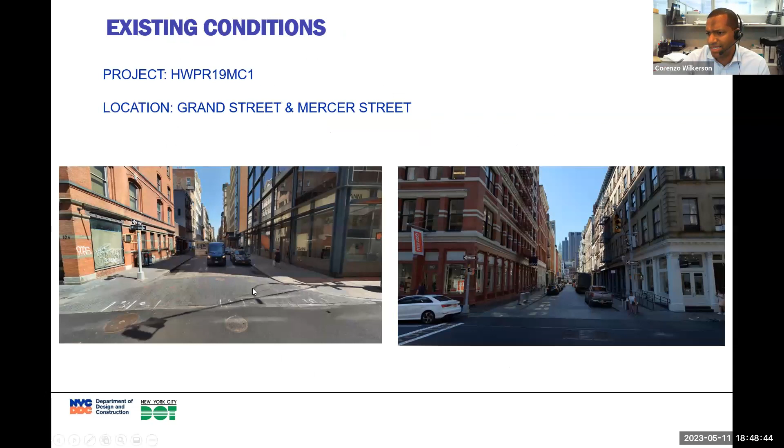Our next intersection is Grand Street and Mercer Street. It has an existing condition as per the previous location. We're only working on 3 of the corners here because DOT has considered this corner compliant. We'll be installing curb extensions with blended transitions and two tangent ramps on the left-hand side of the intersection, and a blended transition on the right. We can see the granite paver crosswalks that we're going to be installing, crossing Mercer Street.

Our next intersection is Prince Street and Mercer Street. We can see some of the non-uniform material with utility cuts from the past, and someone tried to put in a makeshift ramp here as well. At this location we'll be working on 3 of the corners: installing two tangent ramps on the top right, a blended transition on the top left, and a shared bottom landing on the bottom left. Then we'll be installing the granite paver crosswalks crossing Mercer Street.

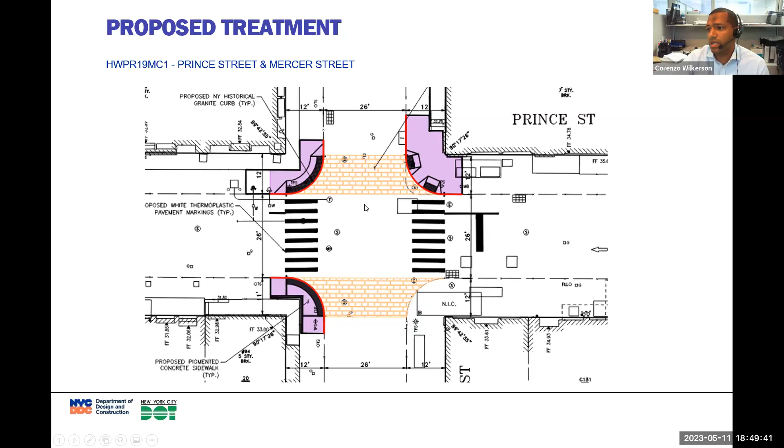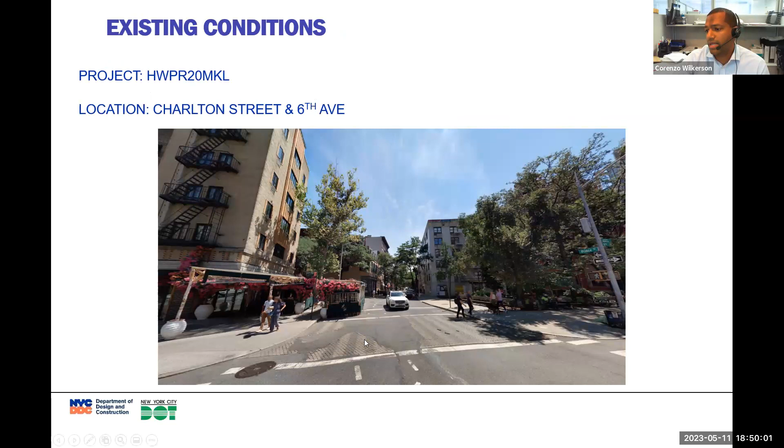Our next location is in project 20 MKL: this is Charlton Street and 6th Avenue. You notice here we have non-uniform material, one material in one location, but due to utility cuts it's asphalt in others. At this location, DOT has specified that only one corner needs to be upgraded. On Charlton Street we'll be providing the granite paver crosswalk, which will run parallel to 6th Avenue.

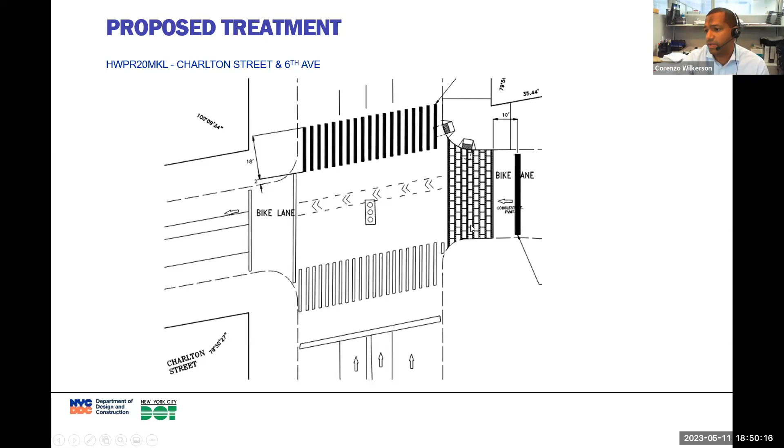As you move along from one project number to the next, is there any difference from our point of view in these groupings?

We've grouped the projects all together, but these locations, as I'll get to on the last slide with the timeline, all have ramps that are going to be upgraded, and they all have the same purpose. It's just that DOT has specified different locations to be in different projects. Each project has about 60 or 70 locations in it approximately, so we couldn't have all of them in one project, at least not at this time.

Our next one is HWPR 20 MKL, at Broome Street and Greene Street. We see the existing conditions, and we plan on working on all four corners here, installing the granite paver crosswalks crossing Greene Street.

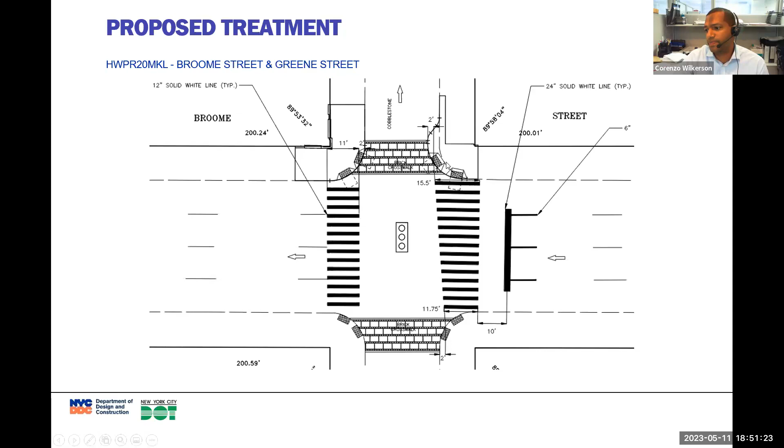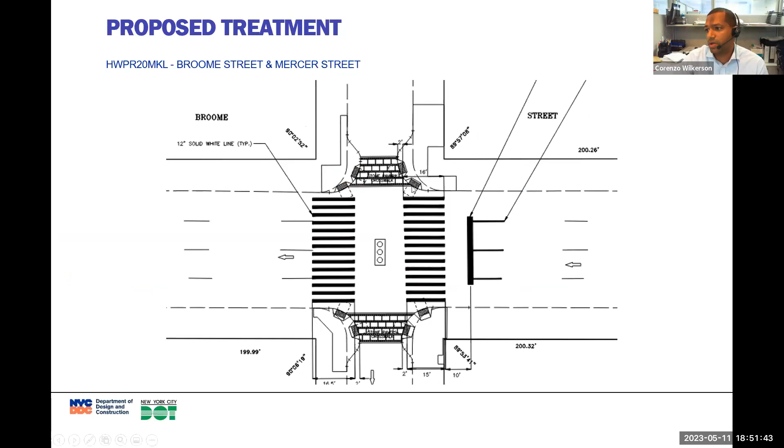Next one for MKL is Broome Street and Mercer Street. These are the existing conditions, and this is where we plan on installing the granite paver crosswalks, crossing Mercer Street as well. We have some curb extensions, so we're going to be shortening the crossing to make it a little bit more accessible, also due to some vault conditions we've encountered during our design.

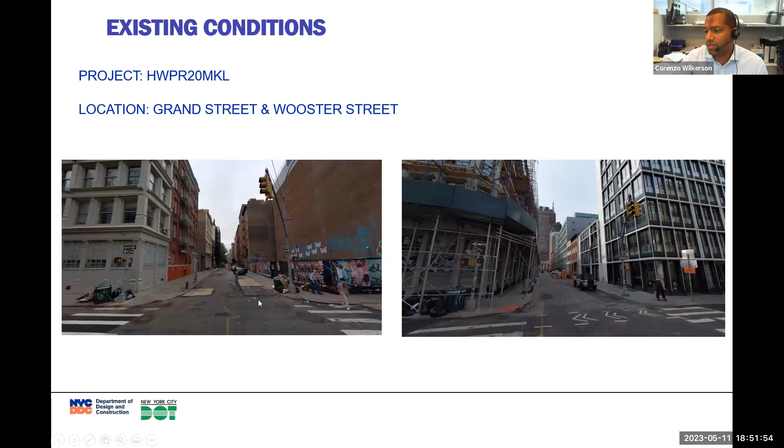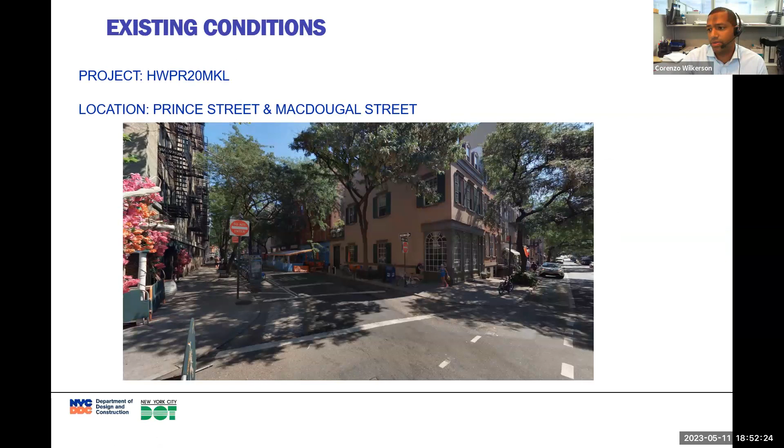Our next one is at Prince Street and MacDougal. This is the existing condition. As you can see, once again, different types of materials within the crosswalk, and the ramps are not to current standards. We plan on upgrading them on both sides and putting in a nice wide granite paver crosswalk here.

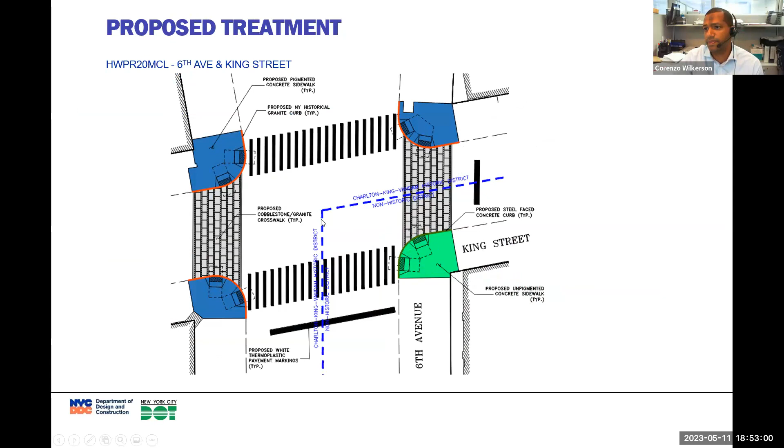Next one is HWPR 20 MCL, close by 6th Avenue and King Street. We're going to be installing the granite paver crosswalks on both sides of the intersection along King. This is a representation of basically where and how that's going to be done. All four corners are going to be worked on, and the granite paver crosswalks will be crossing King Street on both sides, east and west.

Our last location is HWP 2020 LM, at Greene Street and Prince Street. This is the existing condition, and this is where we plan on putting our granite paver crosswalks in conjunction with our ramps, as we see here.

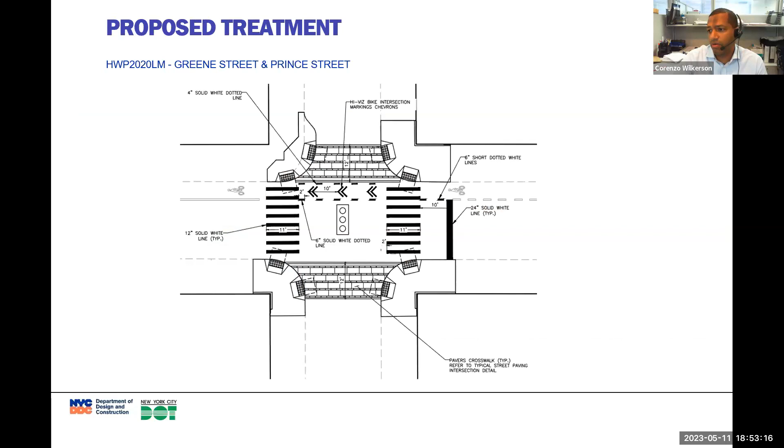So project timelines. For HWP R19 MC1, we're basically in the pre-bid stage. We've wrapped up our design and gotten most of our approvals. We're working with LPC now, but we had to come to the community board first.

For MC1, we plan on going out to bid in the next month or two. For our next one, HWPR MCL, we're in final design as well, and that one plans to be finished in the fall. Our last one is HWP 2020 LM, which is in preliminary design right now, and we plan on finishing that project at the end of the year. These should all be in construction next year.

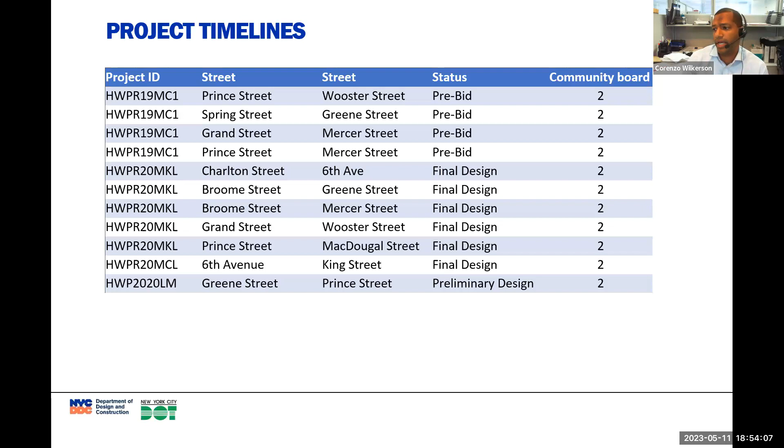That's the end of our presentation.

One thing that we are looking for is just a letter of support.

I think it's all clear. What we're here particularly addressing is, simply put, what it looks like. You mentioned, and if you would say in more detail, the way in which the materials blend or harmonize with the historic pavings, particularly the cobblestones.

As you can see, the cobblestones are incorporated into the crosswalk, but we also provide a smooth granite paver, which allows for a smooth riding surface so that those with disabilities can easily cross the street from one curb. Clearly, cobblestone is not a good surface for a wheelchair.

Yes, it's not. So what we're going to be doing is installing smooth, ADA compliant cobblestones. They will be cobblestones and will look similar to what's out there, but they'll be smooth so that they're ADA compliant.

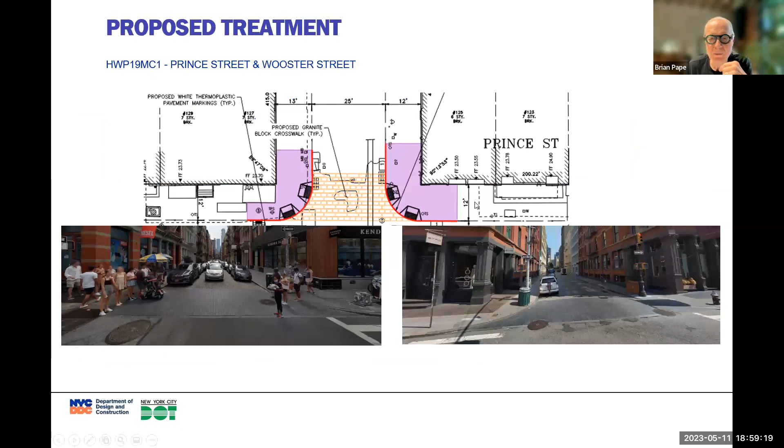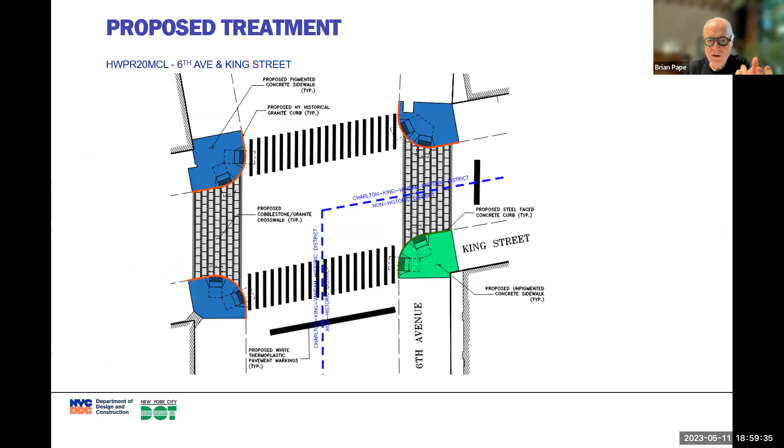My question is on King Street. It seems to me that none of the intersection with King Street and 6th Avenue is cobblestone - if I'm correct about that, it seems to be all asphalt. So you're putting in stone intersection crosswalks, but it's all asphalt. Is that not correct? So there's a different type of block here, if you notice in our picture.

There was a distinct material that was used. The standard DOT material that we would use is asphalt, but to keep with the character of this intersection, we were going to come back with the granite paver crosswalk. I see - it is an asphalt street, but the crosswalk has a distinctive paving material.

Thank you very much, and congratulations on this project. Other people, just go along the group, whoever wants to speak. Eugene? Yeah, can I speak, I have my hand up, Bo. Okay, I apologize, I had trouble getting in, I finally got into the meeting.

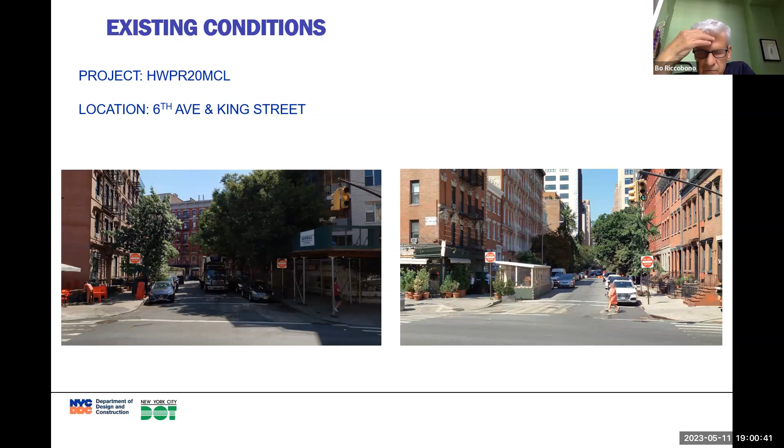Maybe this was addressed already, I apologize. To Brian's point, what happens is, as most of us probably know, individual contractors come in - if you have a water problem, or there are many reasons streets get torn up - and then they're not put back in the proper way. That's just the nature of it, whether it's Con Ed, the telephone companies, or water; a lot of it requires attention to the water feeds going into individual buildings. So I don't think we'll ever get good cobblestones, because of the necessity of doing this repair work, it happens all the time, and the repairs are not good.

That said, the crosswalk issue - I don't know if anybody's mentioned this, but I'm part of the Soho Alliance, and we're very concerned that the pavers might be too large because they crack. This has happened over the years. There's an honest attempt here, apparently, to do the right thing, but because there's an incline at those intersections, the fact that the pavers are so large, in my opinion, makes them very susceptible to cracking, and they do in fact crack. At some point, some of us were able to get DOT to go back and redo the crosswalks in a smaller brick-like fashion. But I wonder if the representative could opine on that - whether these pavers are better than the ones we've had in the past.

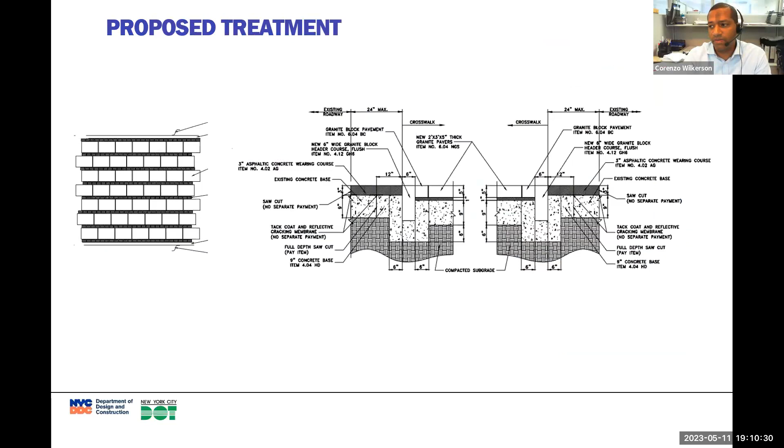Okay, I'm happy to send what's happened to whoever would like to see them. I can send it through the board for you to have visuals of what's happened, because I've definitely documented it over each time. And what we always suggest is 311, bring it to DOT's attention. They're the ones that came and they respond every time.

As explained, we can't discuss the whole neighborhood and structure. Your other questions, you have a place to present them. This is simply not it. That's fine.

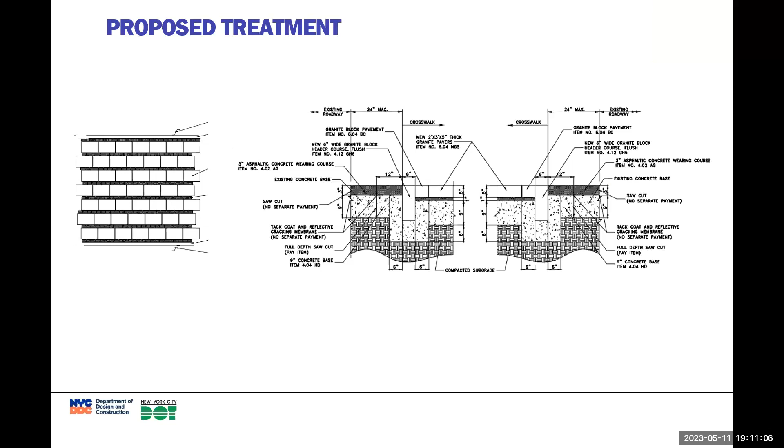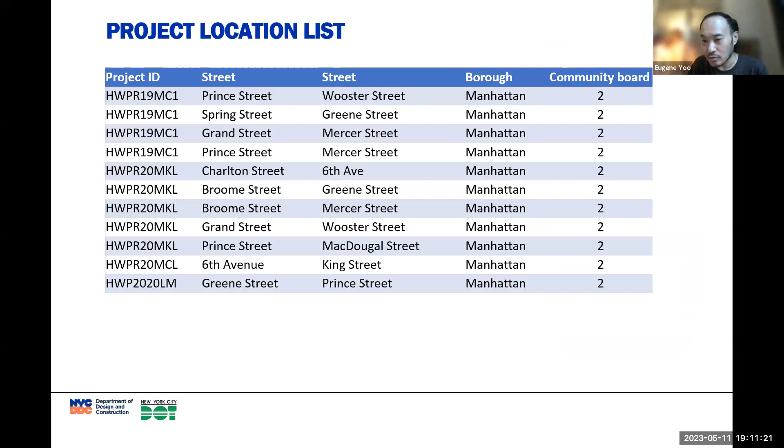Great, thank you, and thank you for the presentation. A couple of questions. On your slide that says proposed treatment that shows vestry, the corner pads that are seen there are white.

Yes. Those are detectable rubber or warning strips, plastic or whatever material they are, they're white here. Is that what we're gonna get in Soho?

Yes, you'll be getting that. Great. Because it's pigmented concrete, you'll have the dark concrete on the sidewalk. Based on the current federal and ADA standards, there has to be a contrast for those with low vision.

So we'll have the white on the dark. Great, so we won't be getting yellow or red like we see elsewhere. No. Okay, great. As long as the corners are in a historic area. So if you have streets that are not considered historic or landmark, they will get the red ones.

Okay. And then for the areas, particularly where the bump outs are being built and the drains, the catch basins, are being dug and installed, two things: One, what is the time frame for when that corner will be out of service? And what is being planned for crossing while a crosswalk is being laid and therefore that crossing is not available?

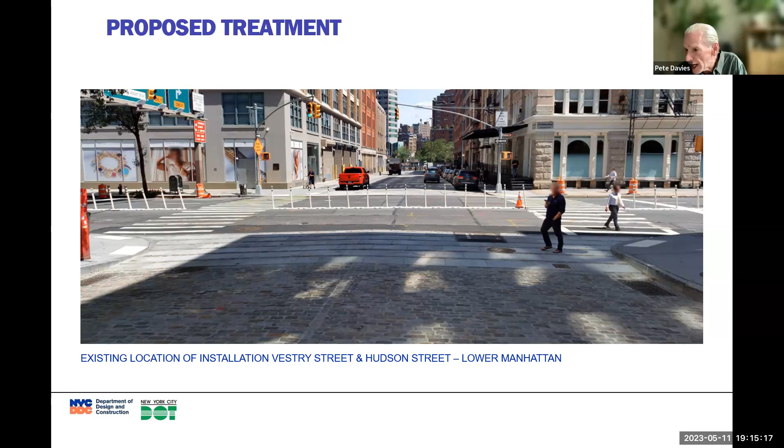So there'll be lighted timber curbs and also pedestrian channelizers, which we'll be using so that individuals, if they're blind or low vision, they'll be able to use their canes or walkers to delineate where their passage is so that they can get onto and off the curbs. And if there are any specific issues with the building because of vaults or whatever, you'll be providing a contact coordinator. Yes, there'll be a CCL individual from DDC.

The community board will be able to talk to that individual about any concerns regarding the project, and then they'll work with the contractor to help resolve those. So the community board will coordinate something with the community so they know who to be in touch with. Yes, we have a community liaison individual from DDC who works with the community on all of our DDC projects. Okay, thank you very much. You're welcome.

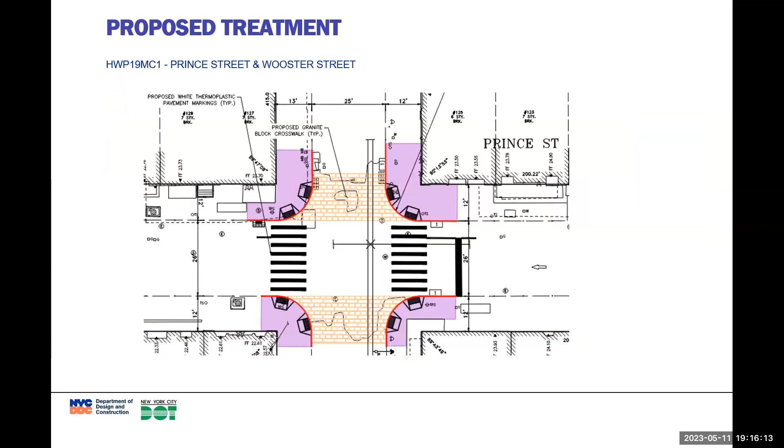I'm going to ask about a specific item on page 12 of the application that shows the intersection of Spring Street and Greene Street. You have a bunch of different kinds of curb treatments, and I don't know if those are suggestions for what may be used in different places and no decision has been made, or if the bump out decision has already been made. If so, on what basis has it been decided that it is within historic representation? Because clearly there are no bump outs in the history of Soho, so that seems inappropriate. In addition, there's a shared bike lane for Spring Street, which complicates it considerably when you have bump outs, because pedestrians tend to stand too close to the edge. Also, has this proposal for building bump outs at this intersection been before the Traffic and Transportation Committee, or does it expect to be?

Those are my questions. For the first one, these aren't suggestions - these designs have all been approved by DOT and coordinated with several other city agencies and utilities. I meant in their specific places you've shown them, like the northwest corner. Yes, everything in that specific location, and the other one is in that specific spot. So you wouldn't do a bump out on the other side, just that one? Yeah, just as we have shown - that's what we're going to be doing. That would be objectionable to me, precisely because of history. There's no point in changing what existed in Soho beforehand. But carry on, please.

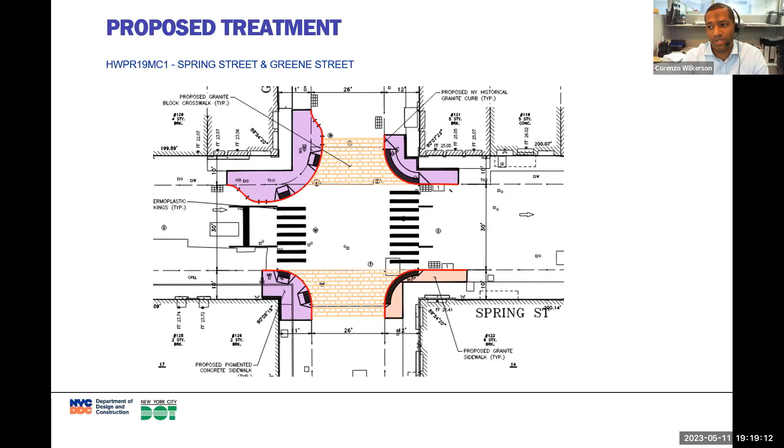The other question was whether this has been before the Traffic and Transportation Committee.

So with our ADA compliance, in order to reach ADA compliance for these types of projects, we are not going to the regular community boards, since we are not asking for people's opinions. This is for accessibility. I'm not sure if everybody is aware, but it's on the DOT website. DOT and the city have been in a major lawsuit in which we have to provide access for every corner in the city. If you could imagine, we have 50 locations in each of these projects, so you're only seeing a portion of them.

So we do not attend community board meetings unless we need approval for LPC, and that's pretty much the only time we go to community boards, whenever those agencies ask for us to go to them. Again, if you have a comment, problem, or question, address the community board office for non-landmarks things, and they'll point you to the right place.

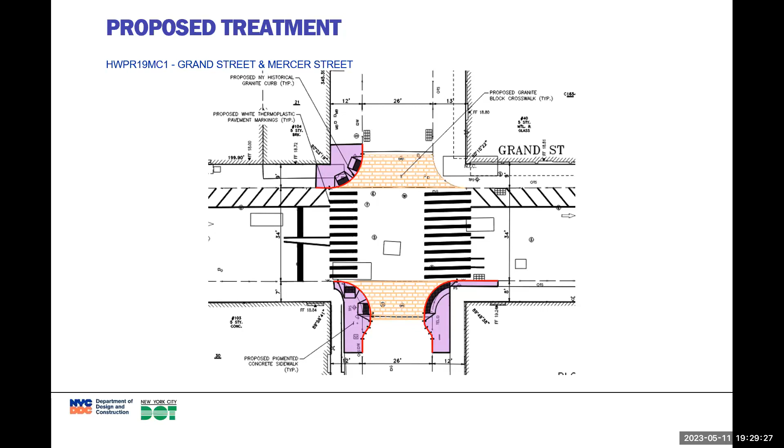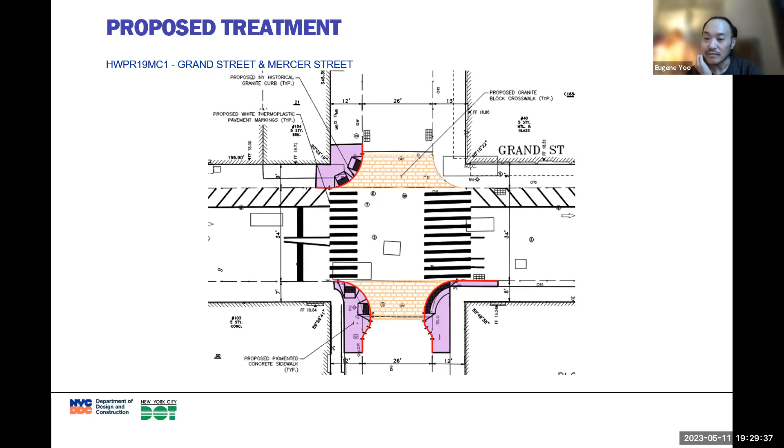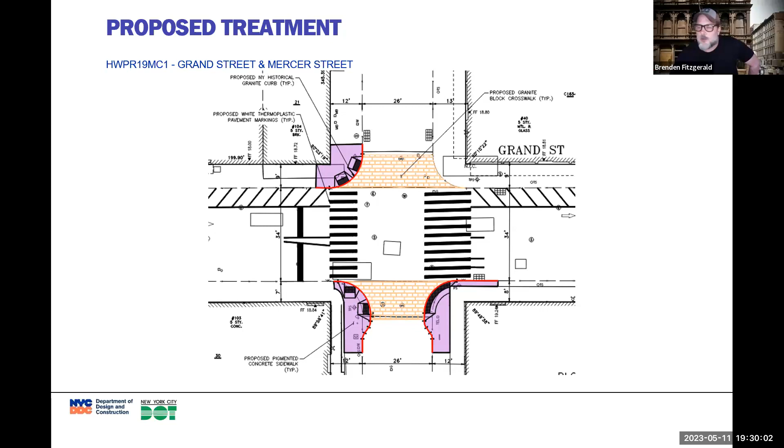Historic granite, there's a plan to remove that in these corners? But you know, they like- Are you talking about the curb, or are you talking about the cobblestone sidewalk, from the roadway? The sidewalk pavement? So the sidewalk, if it's currently concrete, then pigmented concrete will be going back.

If it's granite, all the curbs within the historic districts will be New York historic granite curbs, which there's a DOT standard spec for. So it'll match.

Yeah, I meant to say the sidewalk pavement, where there's granite sidewalk pavement, the very large flags. Oh, so those are basically going to be retained, we're not allowed to rip those out. So those will be reset. If they're broken up into pieces, if they're not a homogeneous nice square, then we'll purchase new pieces that will match, and we'll install those.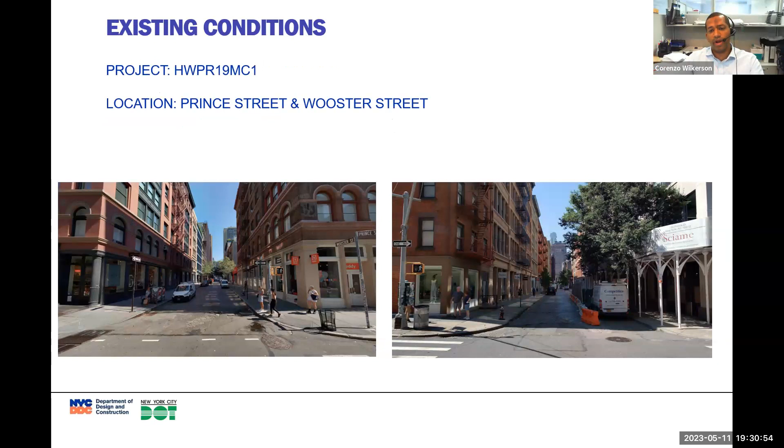So that we can put in ramps. Yeah, I mean, they can always be put in a little bit cracked too. There are some that are brilliantly carved and fan out. I'm not sure if any of these are at these locations, but they're very rare. So even if there's a crack, maybe there's a way to just consider patching. I would suggest that might be something to look into.

Just to answer your question, we do have in the contract wherever there is granite pavement, that's what we call it, it's to be reset. So if at all possible, unless it's broken up into a lot of pieces, we do have to provide a smooth walking surface.

Yes. And then is there a plan to, along with the crosswalks, set a standard that can be applied also to the granite setts? Because there is no standard now, and what we end up with is kind of a hodgepodge, some contractors are filling it with cement with aggregate, some are using just straight cement, some are just filling in with dirt. And so we end up with a situation that's very uneven and very unsafe.

So I would just suggest to check in with the London standards, or go back to the standards from 1912, there are books on that. Just to check out the substrate, because I am a little bit concerned about straight onto the cement. Brendan, could you wrap it up please, so others can speak? It's wrapped up.

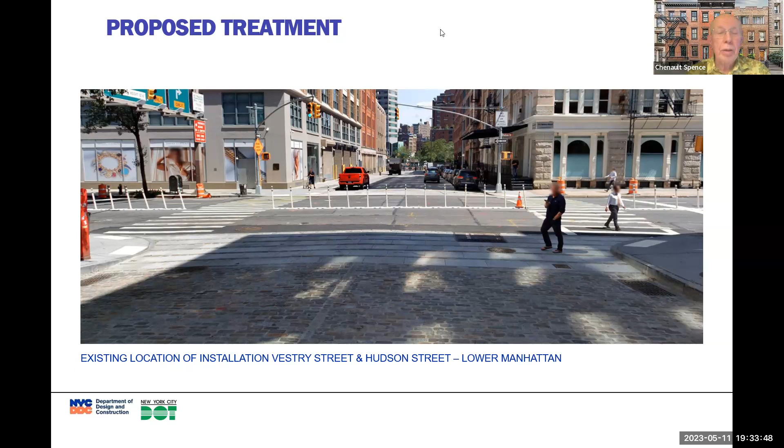We appreciate your care in what amounts to historic preservation, insofar as it's possible, in adapting the historic district to the realities of today. Thank you, thank you.

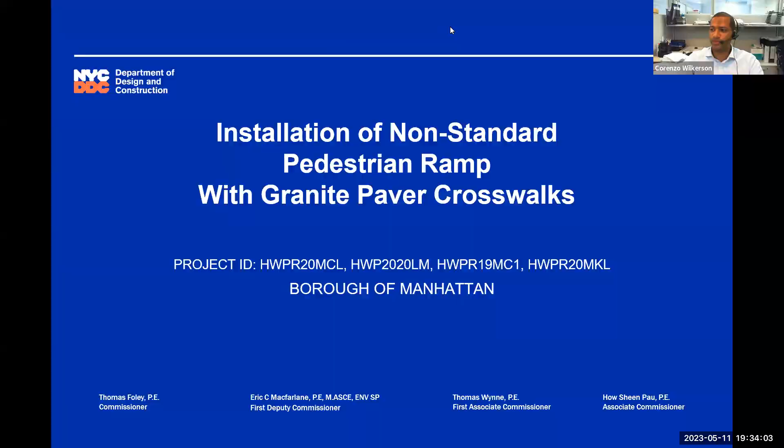And we will simply write a letter in support of the project. Thank you, much appreciated. A little bit different from a resolution that we normally do.

The next is 270 Lafayette Street. The application is to install a new storefront infill in one storefront bay on the Lafayette Street facade and two storefront bays along the rear Crosby Street facade.

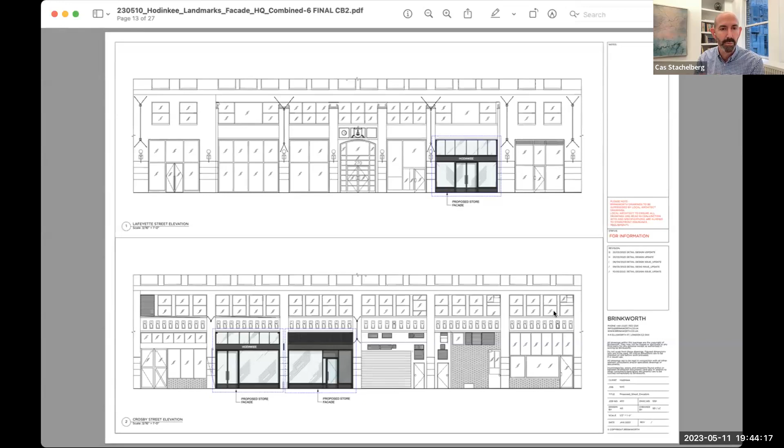Existing elevations along Lafayette Street here, and existing along Crosby here, and then proposed, just showing the new infill in those particular bays - one bay on Lafayette Street and the two bays on Crosby. Similar detailing on both; obviously there's meant to be a consistency from one side to the other, similar to the way we think the infill was done historically.

Existing view of the detail elevation on Lafayette Street and proposed on Lafayette. Again, this is a material sample - there's a dark granite panel proposed here, a bulkhead panel, 18 inches in height, and then tall kick plates at the bottom of the steel and glass doors.

The whole storefront system is proposed to be painted steel, an antique bronze finish - a dark, rich bronze color painted onto the steel. All the framing elements will be done in steel.

And then these are just simple - you'll see this in a detail - 8-inch letters, white painted letters with an LED light behind it. So it's an opaque letter that will just have a very faint halo glow behind it.

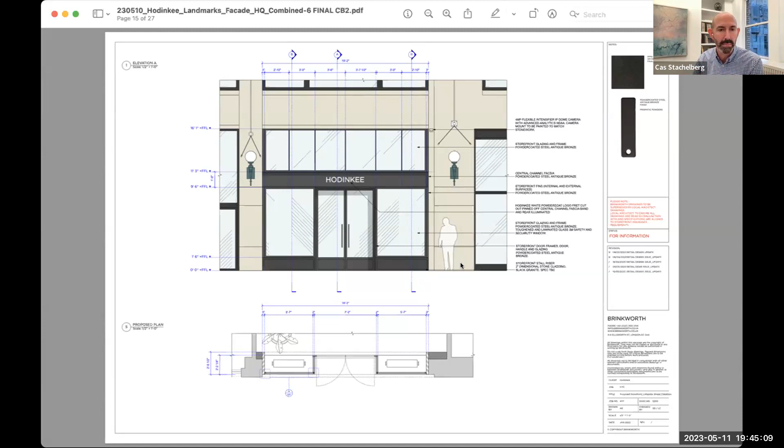Some sections - again, this is the roll-down gate with that spandrel or transom bar here, as I described, with signage mounted onto the front face of that. This is the door recessed back. And this is a section through the storefront window with the granite bulkhead and the roll-down gate assembly above, with a clear glass transom above that.

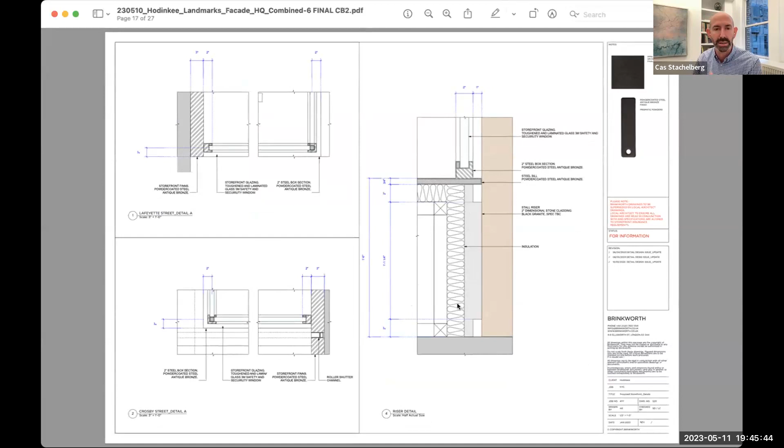Some additional details - it's a simple steel framing system, simple steel sill, granite bulkhead, really meant to replicate the dimensionality and simplicity of that historic storefront that we saw in the tax photo a few slides back.

On Crosby Street, the two bays currently have non-historic infill. And the proposal, as I detailed in the rendering, is large storefront windows, with a channel up here, only signage on this bay, on the north bay.

Louvers above the infill on the south bay, and clear transom windows on the north bay. Also, just to point out, and you'll see this in a moment in section, we're proposing a simple clock mounted onto the stone pier, 24 inches in diameter, about a 30-inch projection off the pier, and you'll see that in section in just a moment.

Similar detailing here, roll-down gates. The security concerns are very important to our client, particularly on the Crosby Street side, which, as you all know, is somewhat less traveled, certainly than Lafayette Street, with the infill recessed and a simple steel and glass storefront system.

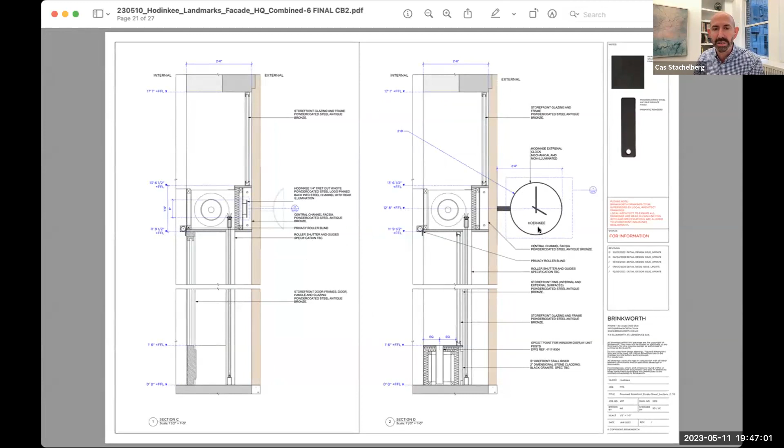This section here shows the clock. As I mentioned, it's just a white metal face with black letters, small letters on the face of the clock that just say Hodinkee. Those will be about 3 inches in height, and then the roll-down gates obscured by the spandrels.

So we think that the clock is a feature that one sees in the district, would have seen at least historically, and it's simple in design, and will provide the time for passersby. This is a detail simply mounted, sort of more similar to a bracket sign really, but also serves as a clock - it's 3 inches in width and 24 inches in diameter.

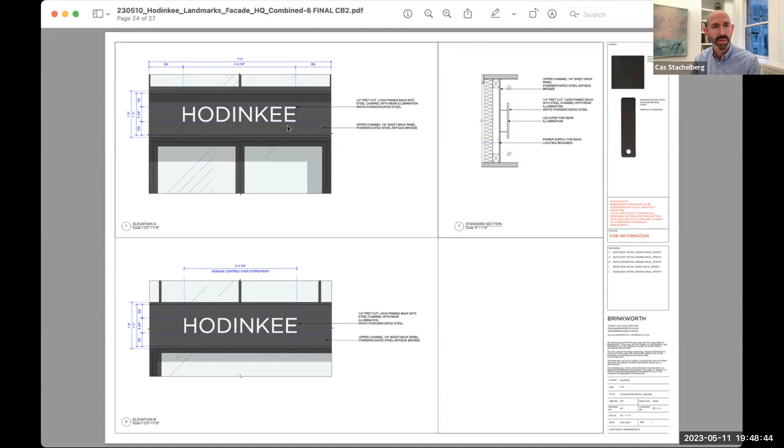Some additional details. Again, these C channels above the storefronts will hold the dimensional letters. These are just white painted metal letters, 8 inches in height, and behind the letter will be a low output LED, so there'll be a glow in the evenings on this back panel. The dimensional letters themselves are not illuminated; it's really the channel that is illuminated, both on Lafayette and Crosby.

Returning to the renderings you saw before, this is contemporary infill, but taking its cues from the historic condition, which was a simple, slender metal and glass system with a granite bulkhead. That's how we're detailing this, with a lot of transparency into the space through large plate glass windows, similar to what was there. Louvers up in the transom will provide necessary air intakes for the mechanical systems, the clock is mounted onto the pier, and then on Lafayette Street, again, a similar infill type, simple signage, and compatible infill with the building's history and character.

I'd be happy to take any questions you all may have.

Thank you. The letters, I want to be clear, the LED is behind them, providing the halo light. The letters themselves are metal, painted metal.

And the question of bronze painting on the steel, where is that throughout? Throughout, yeah. So it's the finish, we're referring to it as antique bronze, but that's the paint on top of it, on the steel. So what we see is antique bronze. Right. Okay, thank you.

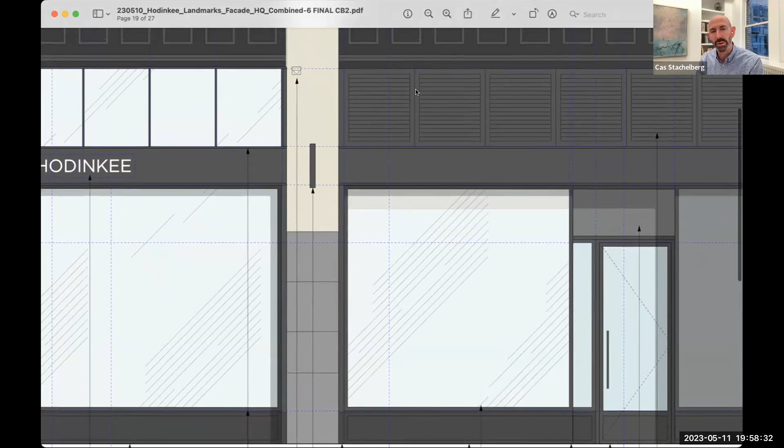I suppose it could be painted a lighter color, but then you're seeing the louvers, and they become a much more prominent feature of the facade, which I'm not sure is better. Let me run up to the elevation, because one thing that doesn't show in the rendering is that there will be framing around them, so they'll be set behind a frame rather than being one continuous horizontal louver—they'll be broken up in the same manner as the transom.

Thank you, Anita. And Brendan? Thanks, Cas, that was really smart and good. Question about the roll down gate—I really admire that solution, and I just am wondering about the Landmarks Preservation Commission's preference for interior gates, just wanted to give you a heads up on that.

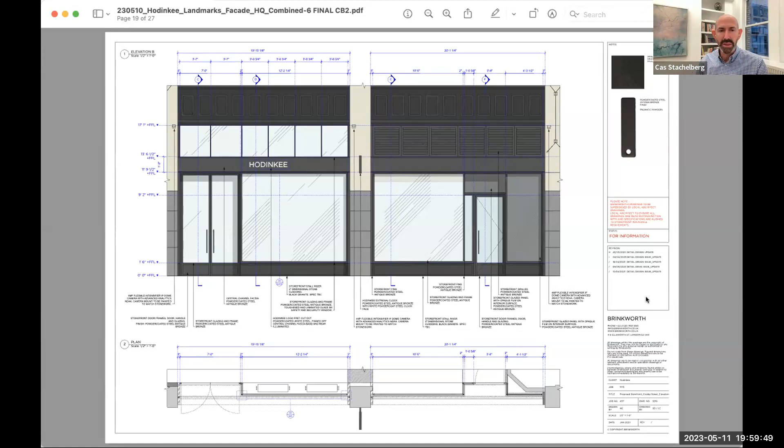Maybe you've already gone through the staff and gotten that approved. This has been part of the proposal for some time, and the staff has reviewed this proposal. They haven't commented on that, and I think the staff rules allow for either detail—where the roll down gate comes down in front of the storefront, with the housing hidden, the gate can be deployed in front of the glass or behind it. But the existing condition has the housing just jammed onto the outside of the existing storefront, so this brings it to the inside. Yeah, it's a great solution. Thanks for the presentation. Thanks.

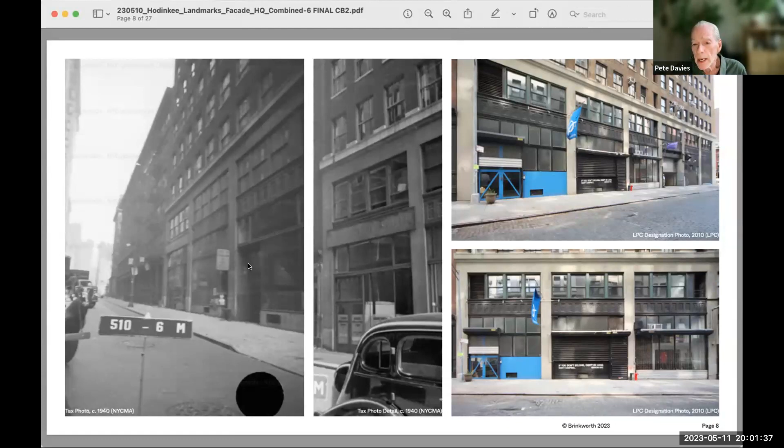Historically, that is larger than what is being proposed. Right now, the vocabulary of the building along Crosby Street, in pretty much every bay that has a window, calls for that higher bulkhead. You guys are proposing to drop it down to 18 inches. I'm not sure what the existing height is, but it's definitely lower. I think that starts bringing the Lafayette Street vocabulary onto Crosby, and it seems somewhat inappropriate. So I would suggest that go up higher.

Question about the clock. Is there any internal illumination in the clock? None, no, it's a metal face. Okay, and do you have any plans for LED screens inside?

But I think this is aligning basically with this lower course of the pier, and just going down to what we're proposing. We may be a couple inches off from what was there, but it's considerably higher than what exists elsewhere on the building. Just pointing out, this brick bulkhead doesn't have anything to do with anything.

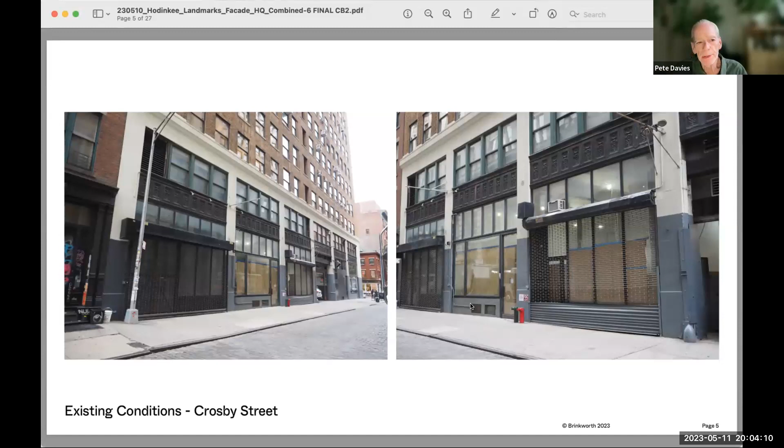Okay, I agree with you that on Lafayette it's appropriate. I think on Crosby, which has a much more industrial look, it's more appropriate to have the bulkier, heavier situation. But thank you. Yep, thank you.

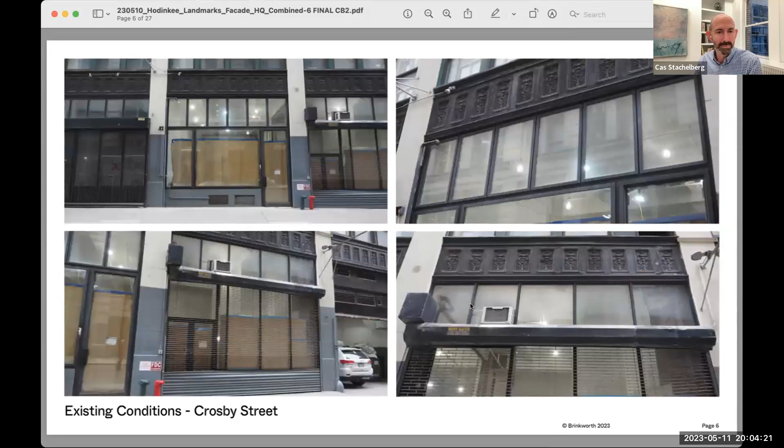I'll be quick, I was going to talk about the bulkhead too, so I agree with Pete on that for Crosby Street. I think the idea of a clock is great, particularly that it's not lit. I'm concerned — and I'm glad to see that the business currently advertising is a pop-up and that location is going to be staying — I wonder if there's any way they can do away with the large advertising they have right now in those windows, shown in your photographs, which I believe is a landmarks violation. That's all I have to say or ask.

Well, as soon as this gets approved, the store is going to be built out. There'll be a barricade in front of the store, and the signs will eventually go away. Yeah, but it should never have been there. Well, okay, they will be going away. Promise. Thank you. Thank you.

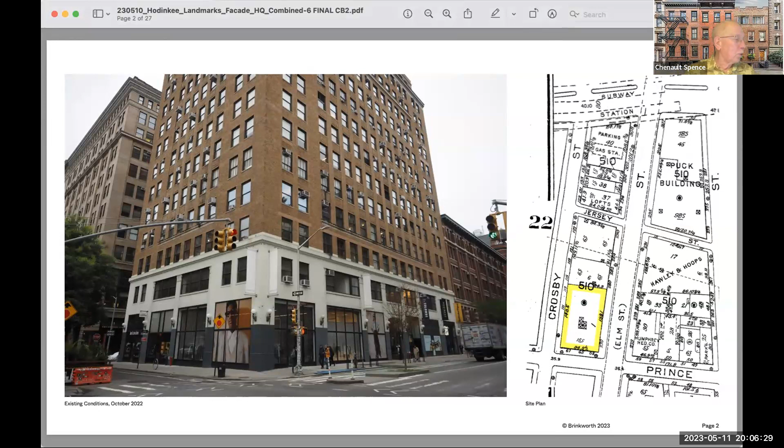52 Charles Street, application to construct a rear yard addition and a small rooftop addition. So it's me again, I'm going to stay on and present that project as well. We've met the applicant, thank you. I don't even need to get up from my seat. Let me share my screen with this presentation. Sorry, let me get to it. Give me just a moment here. Okay, terrific, just switching gears.

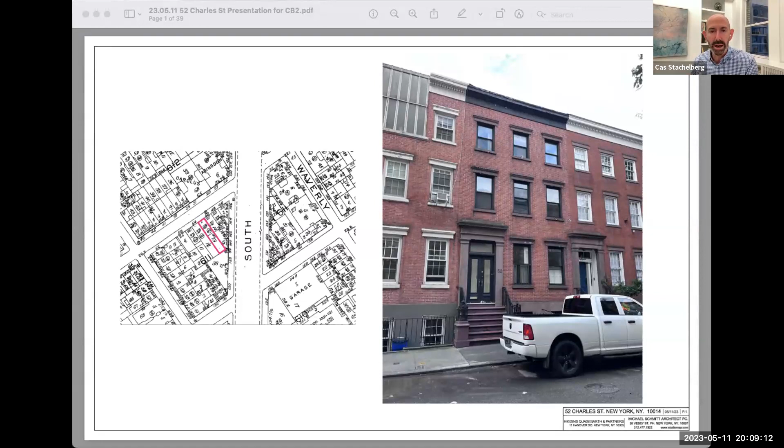Let me give you an aerial view for context before we turn to the street views. 52 is noted here. The rest of the row: there are two buildings to the west, 54 and 56, and then 50 and 48. This is turned around from that Sanborn map, showing 7th Avenue cutting that original block in half.

The recently completed building here on 7th Avenue, and these buildings in the original row, have already been extended. 48 was built this deep, and our proposal is to extend the back of 52 to align with these two neighbors.

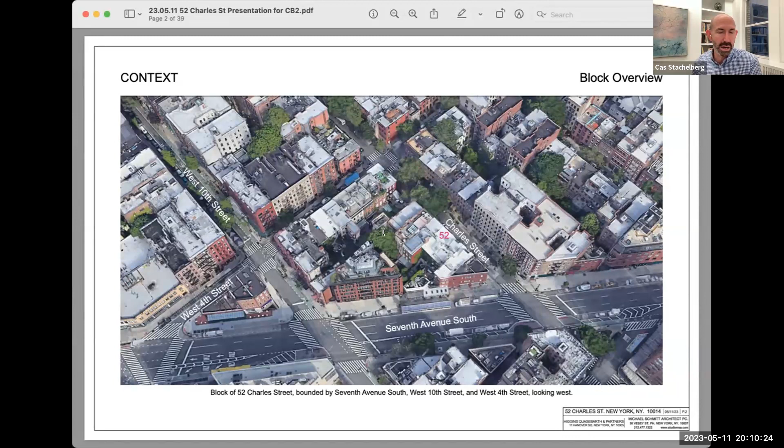The block itself is very exposed, with views into the middle of the block, which is unusual but comes from the cutting of the avenue. It's also quite irregular and dense, with this new apartment structure and back buildings you'll see in plan and photographs, so there's real density already in the back of this block.

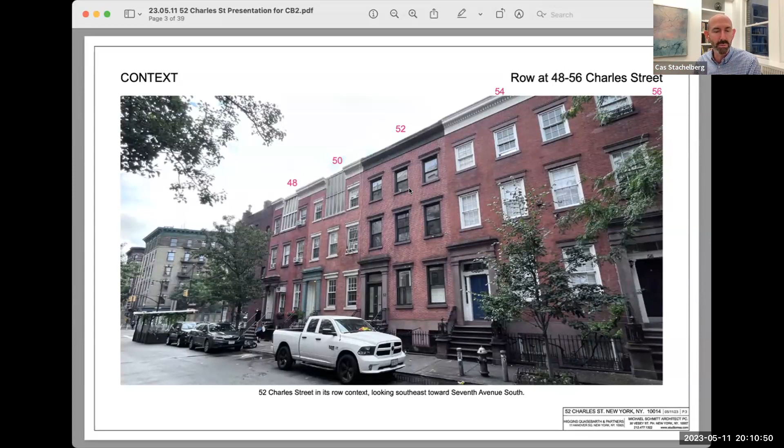A view across the original row: 56, 54, our project address 52, then 50 and 48. You get a sense of the continuity of the row, although studio windows cut into and through the cornice on 48 and 50, along with replacement windows at 52 and painting of the cornice.

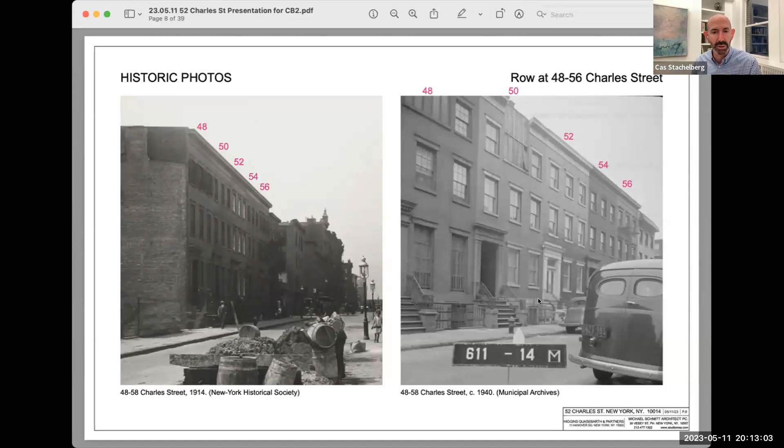By the tax photo in 1940, those studio windows had been cut, and you can see the balance of the row. But clearly continuity in the alignment of the windows, the cornice line, and the porticos and enframements at the low stoops. Historic map from 1911 on the left and 1916 on the right, sort of pre and post subway cut. Again, where you see really the bisecting of this block, and the fact that the back of the lot and its adjacent lots as part of the row become sort of have frontage now on 7th Avenue.

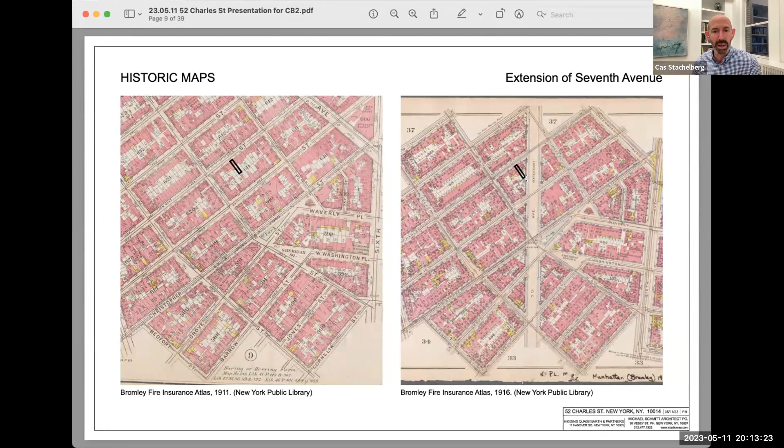Going back a bit in time, just to sort of see the evolution of the row. This is the Perris Fire Insurance Atlas from 1854, and these are the 5 buildings in the original row with 52 at the center.

So 48, the easternmost building, was built with a full height brick extension here. This is a detail of that same map. It looks like there were maybe wooden extensions off the back of these buildings. But 48 on the far right of the row — ignore the numbering, they renumbered the buildings on the block — but the building originally had, 48 had a full height extension.

By 1859, again this is the 1859 map and a detail here, 56 now has, 54 has also gained an extension, a full height extension. So historically, these buildings began to be extended.

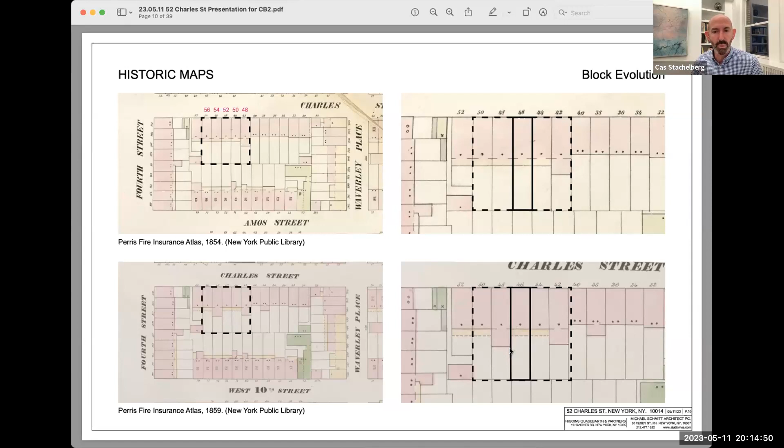And so in thinking about the appropriateness of our proposal to extend the back of 52 to align with 54, I think one of the things that's interesting is what we're proposing we see as an appropriate change. These are changes that occurred historically, but also under commission regulation. So I think tapping into building evolutions that occurred in the 19th century, and again what we're proposing here, I think allows for that appropriate change.

These 2 photos are from 1916, sort of just as subway construction was starting — sorry, it's the same photo. This is the overall, and then this is the detail view. So this is 48 that had the original full height extension, and then the backs of 52 and 50 still had its wood extension off the back, and that had come off at some point here at 50.

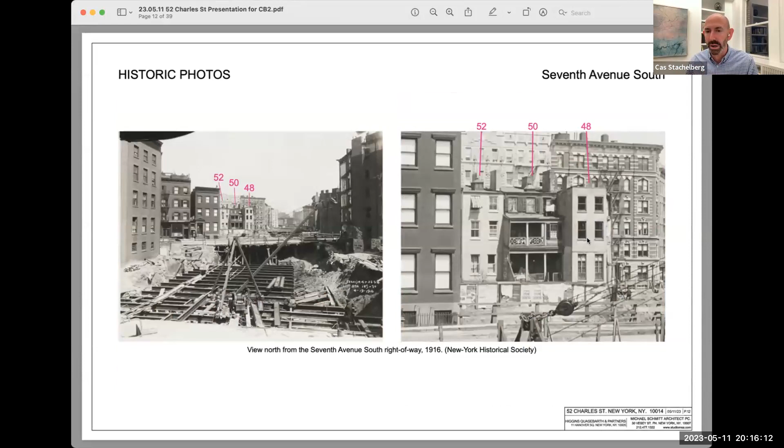So the other thing that came about, and it's interesting along this stretch of 7th Avenue, as you all may know, is as buildings became exposed, the rear elevations became exposed, some of these buildings were redesigned and reconstructed, the rear elevations of these buildings, so that no longer necessarily were, as here in our row, just these simple rear elevations in brick. There were instances where they were reconstructed in a completely different vocabulary.

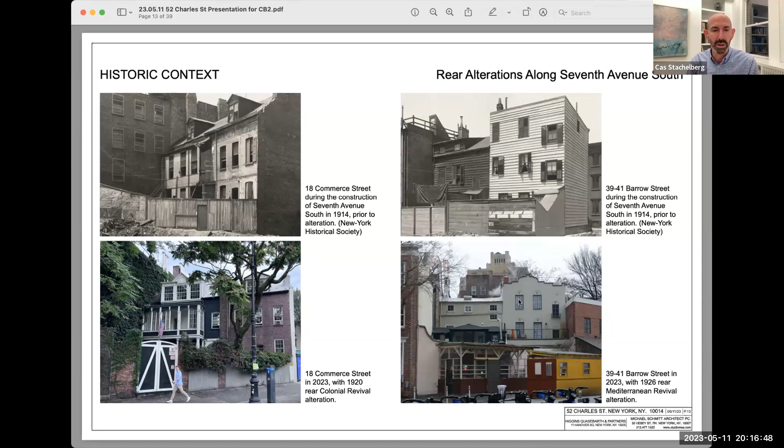This sort of colonial revival expression here on Commerce Street, and this Mediterranean or sort of almost mission style on Barrow Street. So looking at this, we're taking cues from that idea, because now that the building is going to have some prominence — 52 Charles is going to have some prominence — we're looking to integrate a little bit more architecture onto the back. It's still secondary and simply designed, but as you'll see, this idea of reorienting these buildings and giving them two finished elevations is something we were particularly interested in.

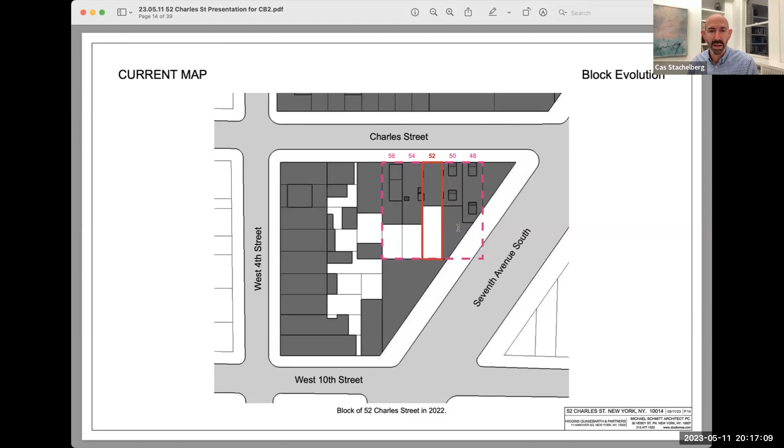So turning now back to the existing conditions. Again, 52 Charles is highlighted here in the middle, and you can see the extension, the historic extension from the 1850s here at 54, a commission approved extension now at 56, and the infill that exists at 50 and 48. Some existing photos.

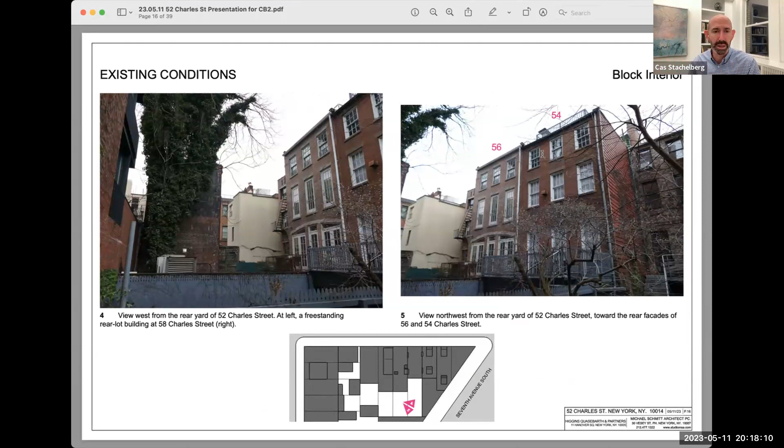The top floor windows will match. There'll be 6 over 6 windows. They'll align across the top, as will the brick parapet above.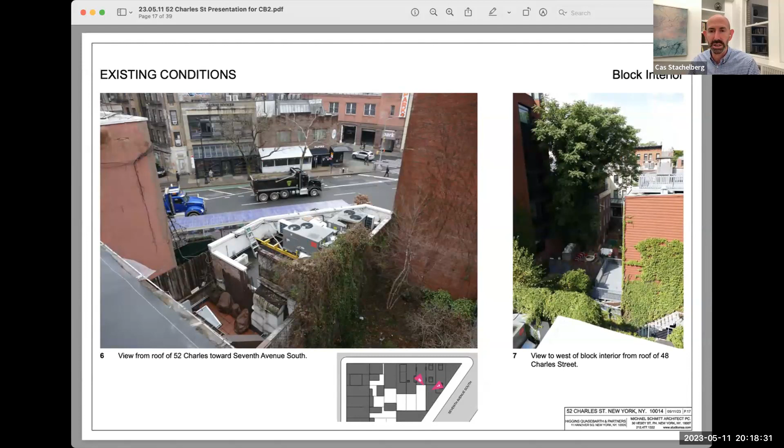The restaurant extends to 7th Avenue South, with mechanical equipment there. And then looking west, you can see the density of the infill in the center of the lot.

Just highlighting a couple of these commission approvals. In 2008, the back of this building was extended out to align with 54. The top floor has double hung windows that are consistent with the historic masonry openings at the back of the adjacent building.

At the lower floors, the commission was more flexible in terms of the fenestration and infill, but there was continuity across the top floor, which we are proposing as well.

At 54, back in 2016, there was an application for a full width rooftop addition, which was approved. We just highlight and illustrate this from that presentation.

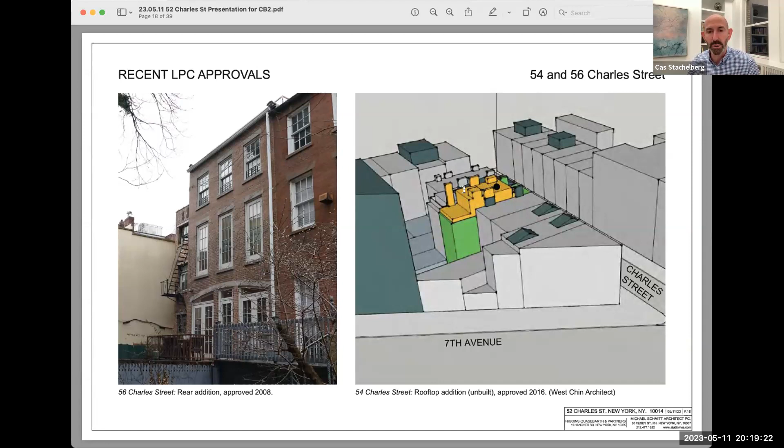That hasn't been constructed, but we note that the commission did find it appropriate for a visible rooftop addition on the building directly to the west.

Turning to the proposed work, this is an existing site plan, figure ground, and then proposed. We're proposing to build out to align with the back of these buildings, and then there's this rooftop addition.

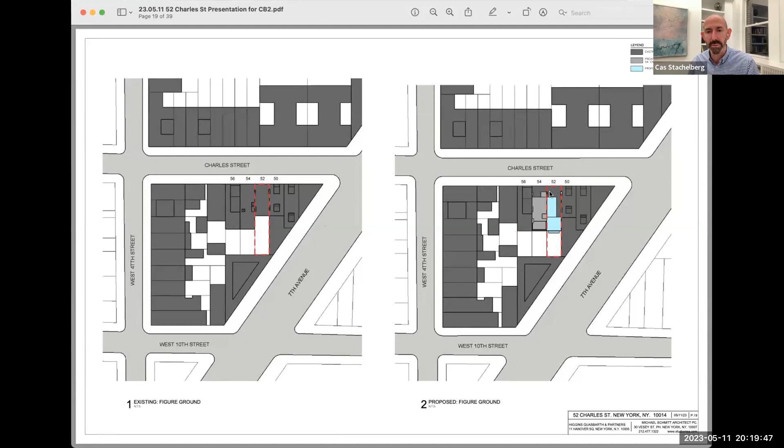The blue is the new construction. The chimney increases in height are very modest. And then ghosted in is the addition that was approved directly to the west, shown in this image.

Looking at the existing and proposed street elevations, this is the Charles Street elevation that exists today with simple 1/1 aluminum windows, and the proposed 6 over 6 windows. You can also see this modest addition up on the roof.

Because we are providing a 6-foot clear space alongside the addition, there's no need for the fire department access to go up and over this, thereby requiring railings.

So this is just a very simple, low slung addition. We have to raise this chimney by 1 foot and these chimneys by about 3 feet, although they're set further back. They're minimally visible, and we've mocked those up, which I'll show you in just a moment.

On the rear elevation, this is the rear elevation currently, and then the proposed, with 6 over 6 double hung windows in line with the adjacent building.

We're proposing just a very small bay, a 2-story, 3-story bay window clad in standing seam metal with a gray, zinc colored finish.

It will have multi-light double hung windows, the penthouse here, and then just a simple railing with a black or dark gray finish on the upper roof.

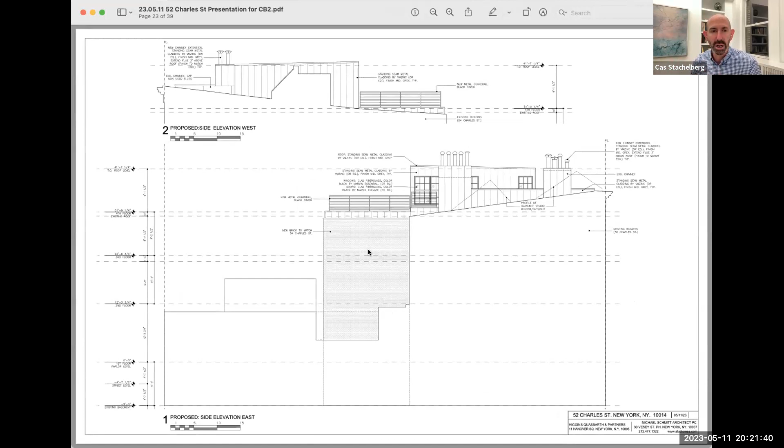Side elevations show the chimneys ganged together and clad in similar standing seam material similar to the back. All the interventions will have a similar cladding, a standing seam gray finish, which will all speak of the same era and intervention.

And then sections. This is a section through the existing building. This tall chimney ties into fireplaces and flues in the existing building, and those are being decommissioned, so this will come down.

These chimneys, there are 4. We're going to be using the 2 southernmost ones, but those need to be raised, as you can see here, by 3 feet above the chimney.

The penthouse, and basically the extension, is this portion here off the back of the house, about 18 feet off the back of the house.

And then the little bay window here. We're proposing to excavate just 2 feet in the rear portion of the cellar. Currently, the cellar is 6 feet 3 inches in height. We're proposing to retain that height near the street, but to lower it about 1 foot 11 inches to the south.

And then here you can see the penthouse set back 15 feet from the front facade. Low scale mechanical equipment sitting on the street side, and then an open terrace on the south side of the penthouse. The rear yard will not be excavated, and there'll be a deep planting bed beyond the garden. You'll see that in plan in just a moment.

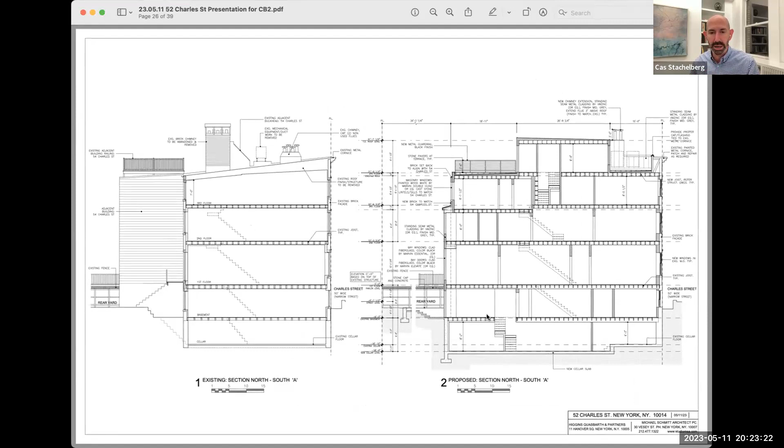Comparative sections, so existing on the left and proposed on the right. Basically, all the floor joists and the floor structure will remain in the original portion of the house, and then we're just lowering it here and putting in new structure, as part of the rear extension.

And then floor plans, I can go through these quickly. The cellar, as I mentioned, the front portion is going to remain unexcavated, and then this back portion will be dropped by about 2 feet with underpinning on either side.

And then as you go up, this is the basement level with the extension, a planting area at the back of the lot, a little more than 6.5 feet, and then just a rear yard here between the planting area and the back of the house.

Continuing up the house, this is the parlor level, front parlor, dining room, and a living room off the back. Bedrooms directly above. Here you can see the second floor. And then just to go up to the roof.

So I'll just stop here for a minute. So you can see the scale of the penthouse, quite modest, setback 15 feet from the front and nearly 19 feet off the back. And it's this 6-foot clearance off of the east parapet that allows for fire department access from front to back. So the roof can just be a simple pitched roof.

It doesn't need railings, which would add additional visibility to the proposal. But we've made this smaller so that we could eliminate any of the ladders and things that you see that require access up and over a penthouse.

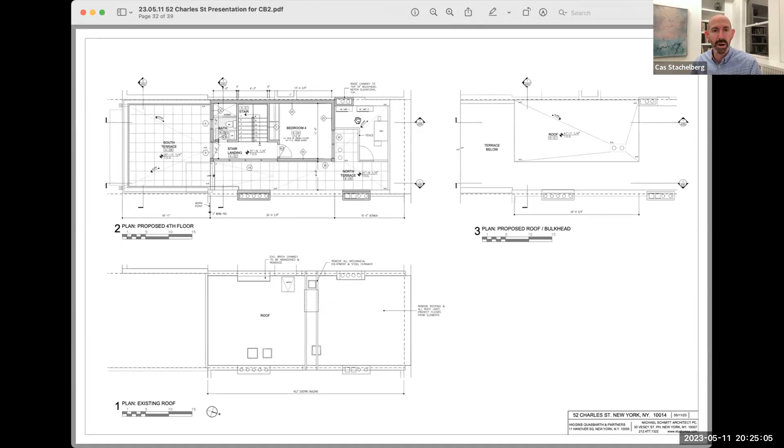Mechanical equipment, as I mentioned, will be low and situated in this corner of the roof and really at the level of the parapet or below. I mentioned that we have to raise a few chimneys. There are existing flues that are visible.

So what you'll see here, this is the overall view and the detailed view. These are existing chimneys. Those will be reconfigured, and this is the new height of the existing one. So it's almost a 1-for-1 swap on this, on the east side.

These are chimneys at 50 Charles Street. And then looking back in the opposite direction, if you're standing out in front of the restaurant Morandi, there's this moment where you can see the chimney extensions proposed on the west side of the building. So that's here and then shown in zoom photo here.

So these are the existing chimneys and flues that you saw in the previous photograph. And these are the mocked up extensions. And then this is the chimney extensions on the west side.

I think this photograph is telling, you all know this better than anybody, but exposed chimneys and flues are almost a character defining feature of the district. You see them when you look across the streetscape, just in this photo, you've got one here, a brick chimney here and a metal flue here. Obviously this prominent chimney on the new building. And then just across this row, you see this varying heights of chimneys across the roofscape.

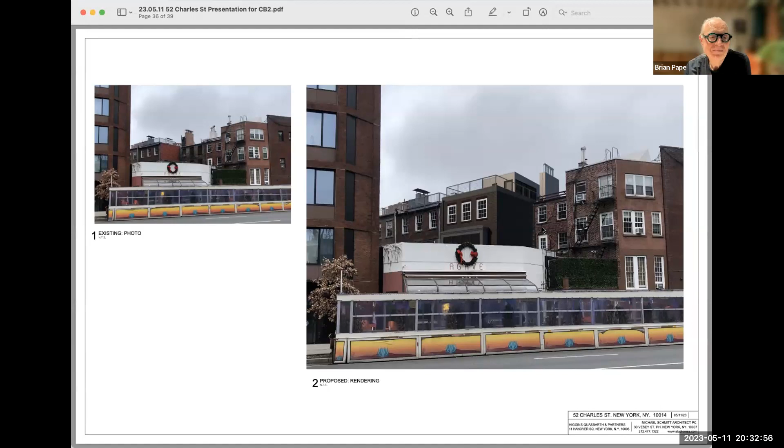Thank you. And what is the depth of this bay window? It's about 2 feet—a 2 foot extension, and it goes from the ground, from the yard level, to the top of the 3rd floor. It doesn't go along the top floor.

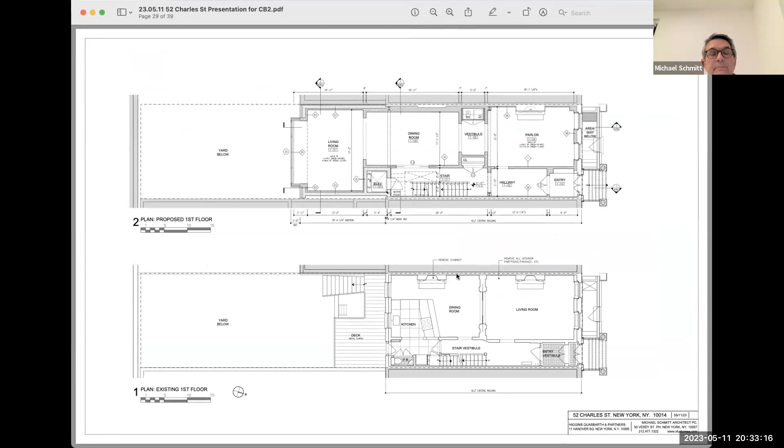Is that all the questions you have? No, we have Albert. Okay, the next person, fine.

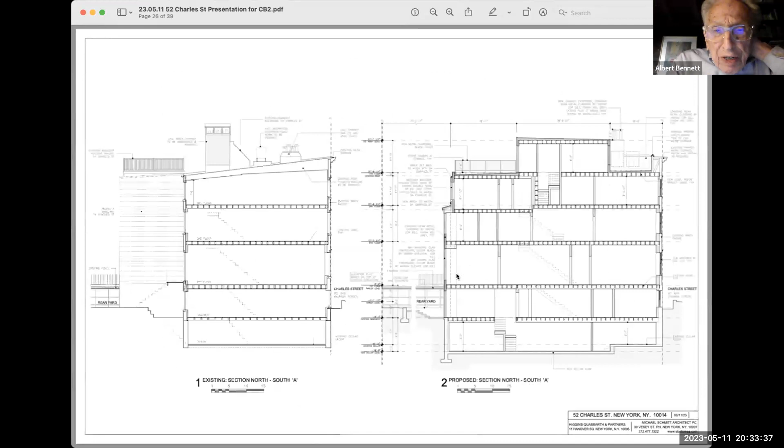About the visibility from 7th Avenue South over Agave, they're fully visible. Could you describe the fence once again? The railing? Yeah, Mike, do you want to respond? Well, we tried to minimize the visual impact of the railing as much as possible. It's a simple steel framed railing, and our thinking was to put the cables, which are very lightweight, in between each of the vertical frames to lessen its impact.

As Cas said, we did a lot of studying because we know this is a very visible view of the back of our building. We did a lot of studies with the railing and with how to reduce the physical height of the roof. There's an elevator, but we stopped it a floor below, and we adjusted floors lower so the elevator overrun would not impact the level we needed to go. The big issue was many studies on the bulkhead, which includes a room, stair, and bathroom to the roof, eventually arriving at the solution of a 6-foot wide pathway from front to back. This minimized the volume of the bulkhead and also allowed us not to put railings or mechanical equipment on top of it, which looked too tall in our initial rendering.

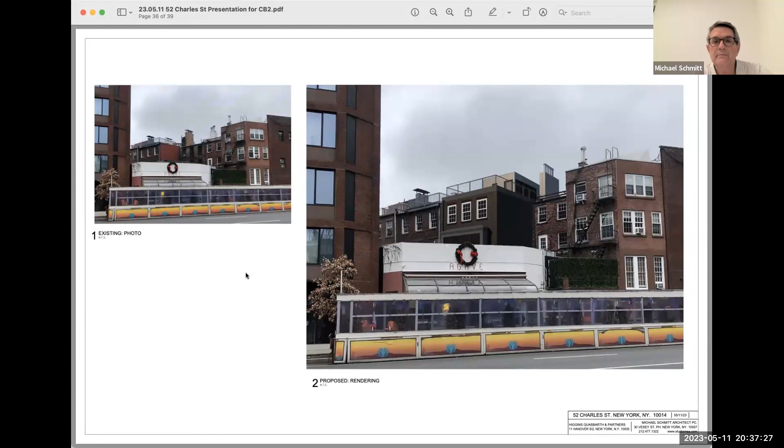As Michael said, we're going to match the brick off the rear to the historic brick directly adjacent, further emphasizing that continuity across the back. No, it's the rendering I'm asking for. The elevation. That's what shows it clearly, right? There was.

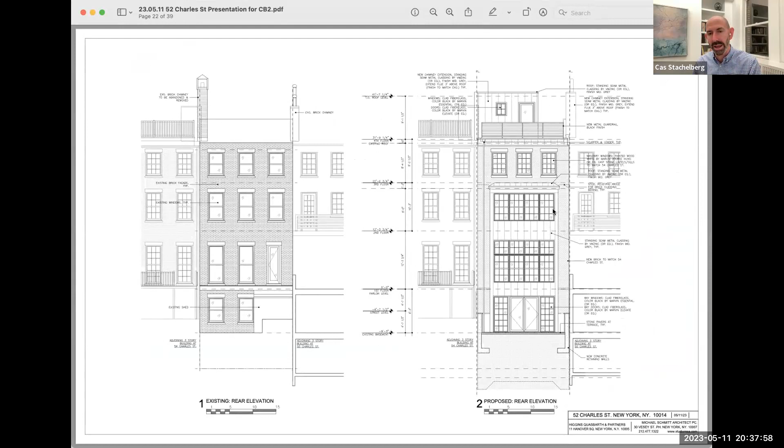I say we just don't see the bayness of the window on this. Okay, I was confused there. Fine, and you can see in this, actually, the equipment on the adjacent roof, so you're only going to see from about this level up, from the 7th Avenue side. Right.

My comment is on the railing. There's one, perhaps it's on Charles Street straight along. Anyway, this kind of system in general is not invisible. It somehow seems modern to have these cables stretched along, and a simple metal railing, as we've asked for in other situations, with as much metal of a modest width as required, just does not have such a contemporary feeling about it. It's the one element we see that's going to look non-historically informed, if you will.

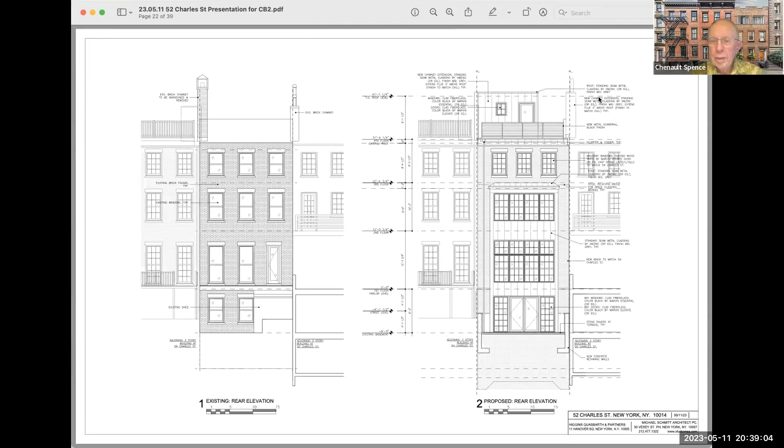Okay, that's all about the question. Any other people at all wish to speak? Okay, thank you very much. Very good. Thank you. Thank you.